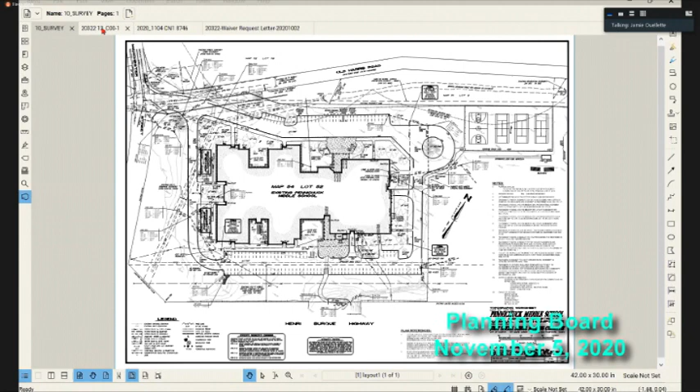Moving to the new proposed site plan. We're proposing to flip that for safety reasons and protocol reasons for the school. So now buses can come from the south off of Manchester and enter onto a secondary entrance, which can be utilized strictly for buses and for emergency vehicles as a secondary entrance to the site.

They'll come around, they'll drop off at the bus back entrance here, come around, and then come to this intersection here. Signalization will bring them out to this intersection. Signalization, then again, proposed signalization would again allow them to go north or south as they intend to go.

Coming from the north, the buses would also come down. They'd come into the site. They'd loop around that same loop and then come out that same way. Parents both would come from north and south through this main intersection. They'd pull into the drop off. They come in, they drop off and loop around and come out the site.

Stop at an intersection here, and then when they're signaled to go, they come to the intersection up ahead and move to whatever direction they intend to proceed. And then there's an additional queuing lane here. This is one of the items that was requested and wanted to be reviewed at that last meeting.

And we reviewed that with the school district and the traffic engineer, and it made perfect sense with counts and observations that were done for pickup time, that there's a queuing lane so that people could bypass the people waiting for the school to let out, and then come into the parking lot or whatnot as they intend to do. And then they would loop around and come out the same way, as suggested before.

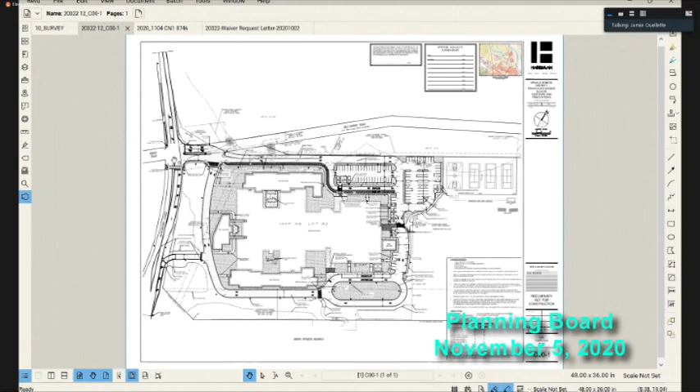Additionally, I'll zoom in a little bit here. It's probably hard to see my screen. There was a comment that we did receive. I wanted to make sure that we noted that we added a containment around the dumpster pad with fencing as requested in the previous meeting.

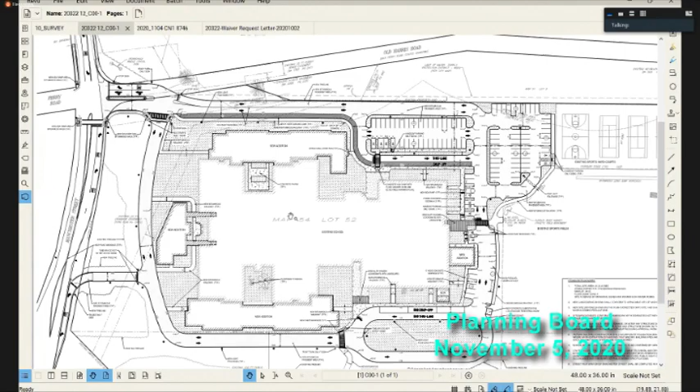And then one of the other topics that we were talking about at the last planning board meeting was the signalization here and whether that was warranted or not. Giles is on the call here and can talk a little bit about what that means. Sure. Giles? Yes, that's my cue.

Good evening, Giles Ham with Vanasse & Associates. Just by way of a little bit of background, in June of 2019, VAI was retained by the City of Nashua to look at several school alternatives within the community, and obviously this school was one of those schools we looked at. I personally have been out to the school on several occasions, back in June of 2019. We've conducted a series of traffic counts at the school,

and we made a number of recommendations to improve safety conditions in the area, particularly for the children crossing Manchester Street. At this location, we made recommendations to upgrade all the school signage along Manchester Street to establish the school zone and the end of the school zone. As Jamie alluded to, we're separating the bus traffic from the drop-off traffic in the pickup area, which is appropriate and typical for schools like this.

And then finally, we've recommended signalization of the school driveway. A lot of that was in the 26-page document that Matt alluded to, the earlier document that you've had. Subsequent to the last meeting, in the memo that you've got this week, we've updated the signal warrant analysis at that location. Essentially there are 9 warrants, but the one we looked at in particular was what's called the school crossing warrant.

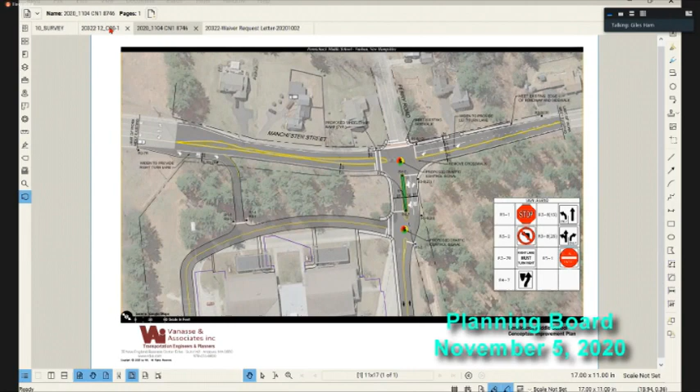So that's really a brief summary. Again, it's a detailed engineering study. The signal is warranted. We feel that this will provide safe conditions for the children crossing the street. And that's really a brief summary of what we've done. Okay.

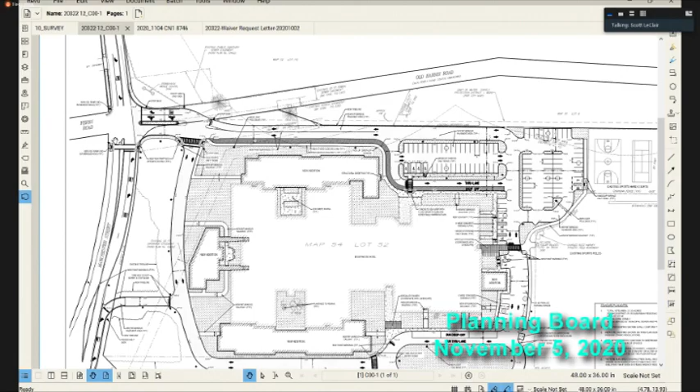Can you talk about the crosswalk in the construction? I can see it on the left side of the plan. What's the intention there, are there walk buttons, or what's the control concept? Yeah, so the signal itself will be fully actuated. That means when there's a demand on the street or a turn lane, that'll call the traffic there. And certainly the crosswalk there will be pedestrian push button. So you push a button, it stops all the traffic, and then there's a safe crossing.

So what's different when you look at this plan here, and came up with our staff discussion, probably last week, is that right turn lane, we're probably going to take that right turn lane out. We've looked at that. And what that allows us to do is to reduce the crossing width for the children. It's a 40-foot crossing with that right turn lane out.

We're going to have at least 16 seconds for safe crossing. And that's based upon studies in terms of the width of the crossing and the time people travel, feet per second, as well as a startup time and then a time to accommodate that there'll be more than one student crossing at the same time. So yes, pedestrian actuated.

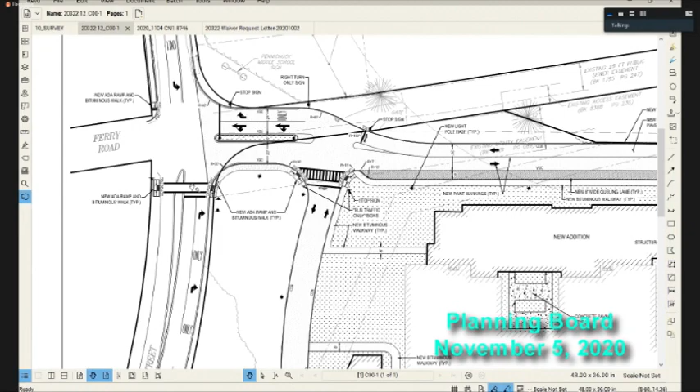Okay. And again, can you scroll down the page a little bit? So the right turn, you feel that can go away because? So the right turn lane, the upper one, right? That one will probably be eliminated. Again, we haven't done the design yet, but we've looked enough at that to think we're probably going to take that away. The other lane is just for the buses only. The buses come right in there and they loop around, and we think that's a good idea.

Okay. All right. And the reason the right turn lane would go away is more to do with shortening the crossing distance and time. Right, and that was a suggestion of city staff, and it was actually a very good suggestion. We had a good dialogue with staff about the proposal here, and the concern is that we need to time the signal such that traffic doesn't back up to Route 3. And keep in mind, with any school project like this, we're really looking at a peak 20 to 30 minute period that we need to handle this traffic and process it in and out.

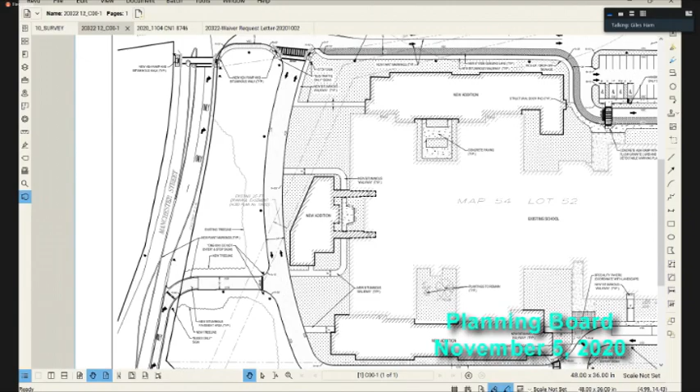As with any middle school, any school project, you have a large peaking, and you'll have some queuing on site and queuing to exit, and that's typical with any school project. And as you've seen on this plan, we've modified the on-site queue storage to adequately accommodate the parents. The peak time when you have the queues there is in the afternoon, where the parents arrive early and park and wait for their children to get out of school.

It's also important with a project like this that when this new change is opened up, the school should send some correspondence to parents and caretakers to update them on how we expect them to behave and the procedures for entering and exiting the school safely. That's typically done before you open up a school like this. Okay, thanks.

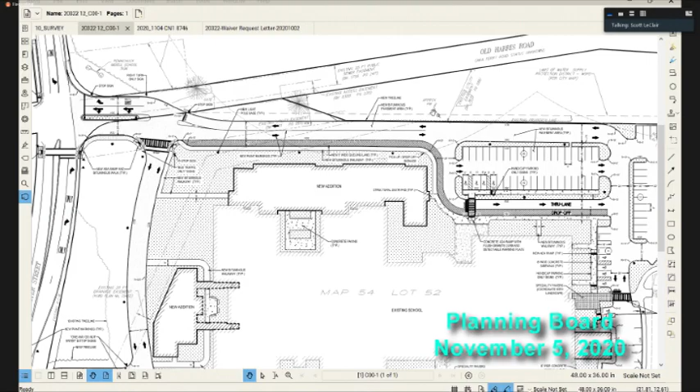All right. Anything else you want to present before I open up the board questions? I'm all set, Mr. Chair. Would you like me to close my session here? I think you can leave it up for the board part. They might want to reference it. They're pretty good at speaking out. So anybody from the board who wants to ask some questions, go ahead.

Weber? Go ahead, Weber. Yeah, a couple of questions. One, the queuing lane for people to drop off and pick up. Have you figured out that this is sufficient for the amount of traffic that you've had?

Yes, so when I was out there in June of 2019, one of the things I looked at was the queue. So currently, or in 2019, the queuing is in the back of the school, and they double stack to pick up. So we've looked at that distance and that queue, and we've accounted for the fact that the school population is going to increase. So we think that that's adequately sized

appropriately. Okay, also, are you going to be putting no parking signs on the queuing area, only pick up cars? That would make sense. Yes, that would make sense.

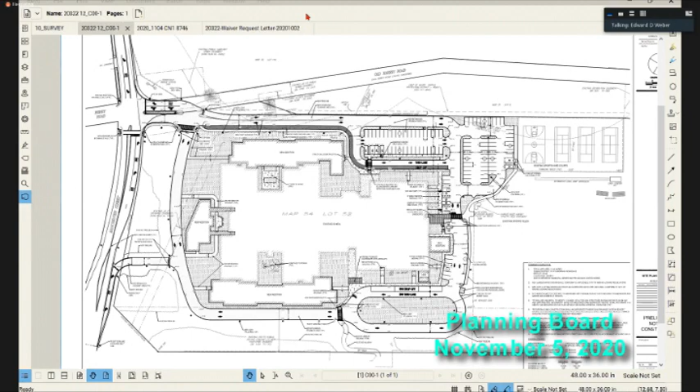Inside the school area, there's a crosswalk there. Is that also going to be controlled so that pedestrian students don't interfere with the busing traffic turning, coming in, coming out? I'm sorry, what's your question again with regard to that? Right where you're at, is that just going to be not lit, nobody pushing a button? They're just going to be able to cross when it's clear?

We really haven't gotten to that detail yet. Certainly we could put a pedestrian signal there, that would maybe make sense. Keep in mind that exiting traffic there is going to be school buses, and you have about 11 school buses today, so that's going to increase with the expanded school.

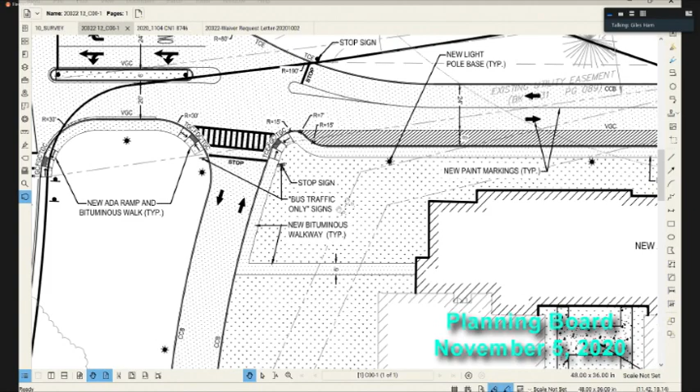The other thing I would tell you, it was a good point, is where we have the queuing area, typically we'll put signs like parents can't leave your car, because what we don't want is to have them park their car and then walk in, and then it doesn't work. So there'll be appropriate signage to make sure this works correctly and fluidly.

And like I said, a real key is to get some correspondence out to the parents and say, this is the new school. This is how we operate. This is how we expect you to operate to make this work well and safe for the school children.

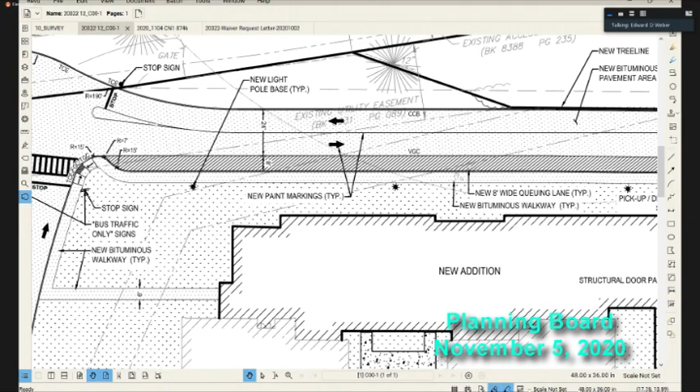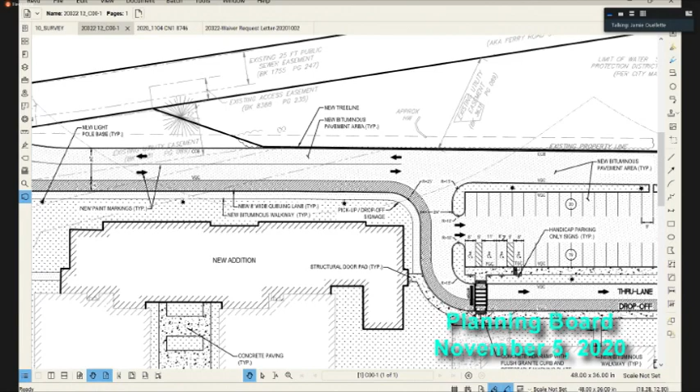Okay, and the next one, I see a lot of directional arrows and things like that. Will these be thermal painted so that in a few years they're not gone? We can review that with the school. I don't know if it's been decided officially yet, but we can review that with the school district as a good option to include there.

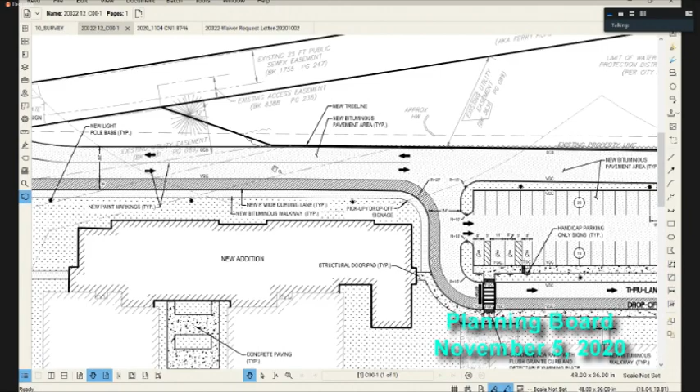Okay. The reason I was concerned about the queuing is so that people aren't parking across the street waiting for the entrance area. That's why the queuing is important to be the length that it is. That's it. Other questions from the board? I have one. Go ahead, Mr. Peterson.

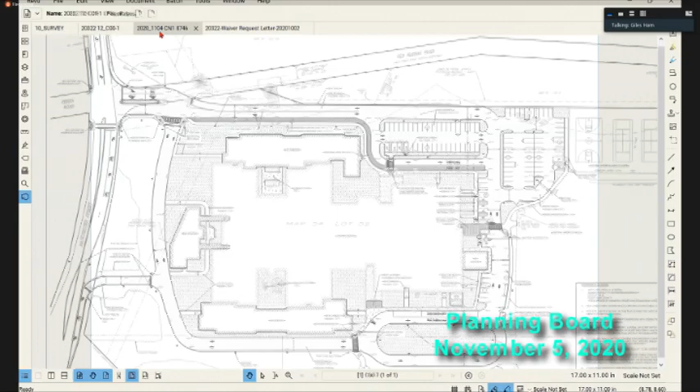The right turning lane that will be removed for vehicles heading north, will those vehicles still be able to make a right turn into the school with that lane missing? Oh, absolutely. That lane will basically be a through and right turn lane. And again, it's a matter of safety and reducing the crossing width. And I think that was a good suggestion by city staff. Okay, thank you.

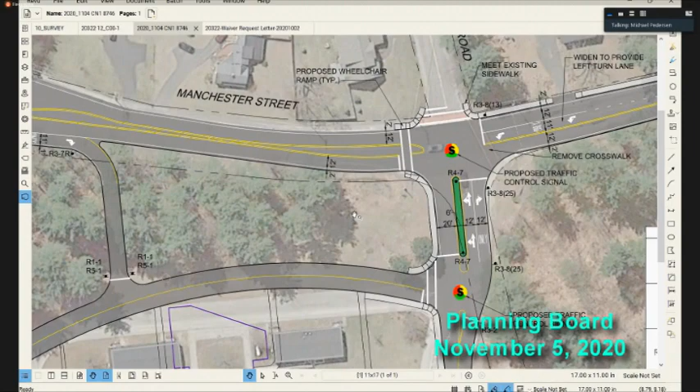Just to clarify, the right turn in there, would that be a no right on red? Maybe you haven't got that far yet. Yeah, we haven't really, this is just concept. We're just getting back on board, quite frankly, with the project. And so we were asked to pick up from the last meeting and help you with your

questions this evening. And then subsequent to an approval by this board, we would get into the real design detail of the signage, where the mast arms are going, the pedestrian signal heads, the pedestrian timings, how long when you press the button, and all those things. That's a lot of design that's really subsequent to this effort. Okay.

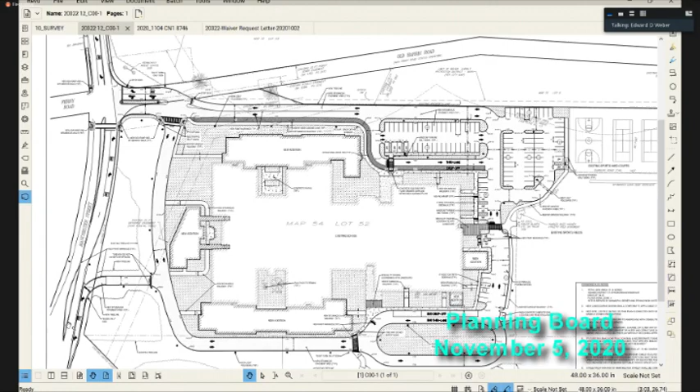Other questions by the board? Weber again, I'm sorry. Go ahead, Mr. Weber. With this one lane only, emergency vehicles, if something happened, has this been talked over with the fire marshal at all? Yeah, early on during concept design, we had a meeting with the fire marshal and police. And this was actually a push from them as well. Two entrances to this site was strongly desired. So the answer to your question is yes.

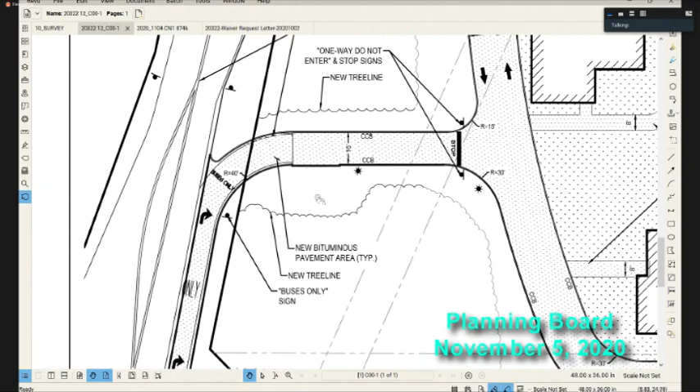Okay. And Jamie, one other thing, just to make sure I'm reading it right, that you did make a change: that center parking island that's in the drop-off area, that's like one way in, one way out now? Yes. Oh, yes, that's right. We flipped the arrows here because parents were coming in through here. It made sense to have this as a one-way so that people weren't trying to kind of loop back into that same drop-off area.

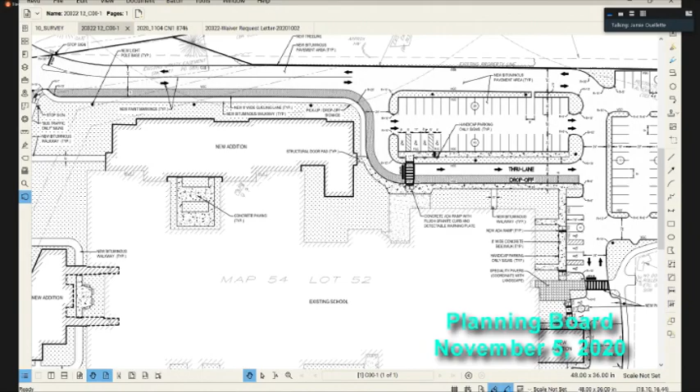So if they were just coming out and everybody was coming out that same direction, that made sense. I should also mention that we did notice that in our previous submission that you would have seen before this, this arrow was flipped as a one-way as well, and that's not intentional. It's supposed to be just like you see here. It's two-way traffic for the buses coming from the north. They'd be able to come in and come onto site because they can't obviously make that turn that you see down below there.

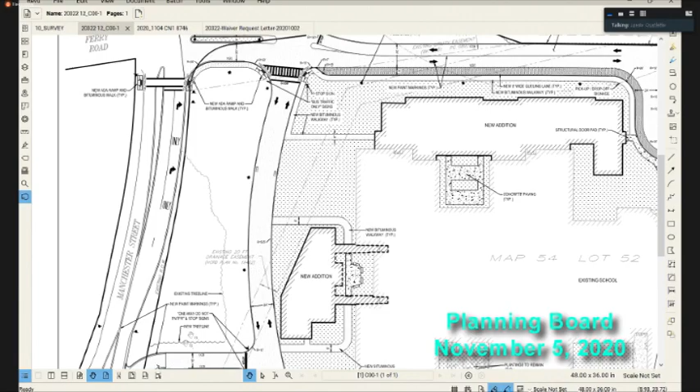Yep. Okay. Any other questions by the board? You can probably stop sharing, Jamie. Okay, sure. Mr. Chair? Go ahead, Mr. Bollinger.

Yes, thank you. I just wanted to clarify, we went from one hypothetical signal, I think at the last meeting, now we're talking about installation of 2 signals. Is there any idea of the anticipated cost, even if it's a ballpark, roughly the cost of installing 2 signals at this location? The cost is part of the school project budget. The cost to install the signals are.

Well, okay, but like, how many dollars are 2 signals eating out of the overall budget? Is it 200,000, 500,000? I'm just trying to understand, because the premise of the question is, I believe Mr. Ham gave testimony that this is really only going to be needed for maybe about a half an hour in the morning and a half an hour in the afternoon. And let's set aside the internal signal for a moment, the one actually in the public right of way. I'm having a hard time wrapping my head around the fact that we're going to have a signal that basically does very little for 23 hours of the day.

There are other types of array systems out there that track with the sun, and those are positioned north to south. This is a fixed tilt that'll have a 25-degree face. It'll be constructed on steel posts and steel racking, and all of that gets grounded and put together correctly through our certified electricians. The construction for solar is remarkably simple, and it's very quick.

We don't require any formal or significant foundation systems for our array. We can drive these C-channel or I-channel beams into the ground 4 to 7 feet deep. That provides a resistance for pullout, and it gives us the stability as well for the loads of wind and snow on the foundation.

So once the trees are cleared and the ground is kind of manipulated slightly, we try not to do too much grading. We like to work with the land and minimize our impact on the land and allow the natural vegetation to grow back quickly. So we try to minimize our grading. And then that allows us to get quickly in here and install these posts. If you would flip to the next picture.

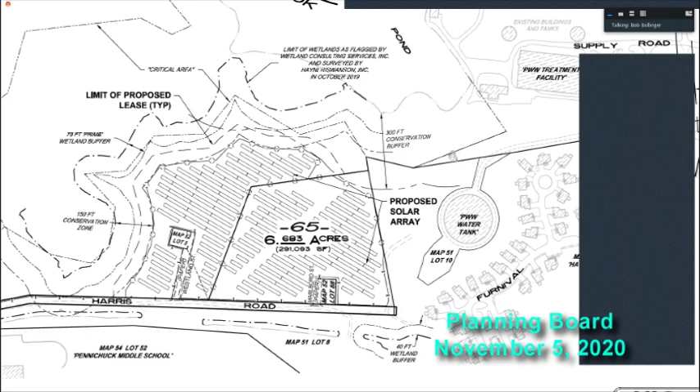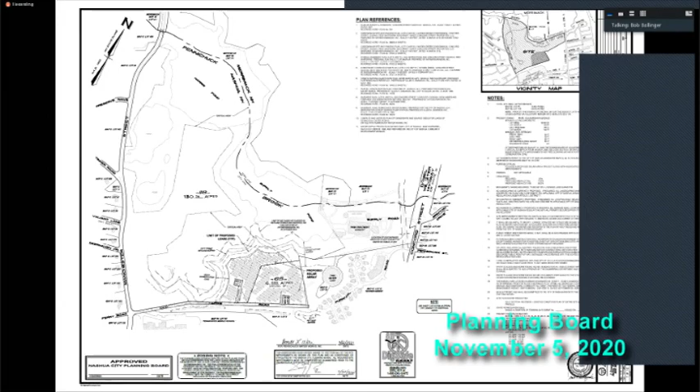Thank you. Mr. Chair, if I may ask another question? Yep. I think this one would probably go to Mr. Zajac. I think you may have addressed it generally. I think the primary comment from engineering staff that jumped out to me was with regard to right-of-way and ownership. I think it was their comment number 2. Do you feel that you have sufficient documentation with regard to ownership issues and paper street issues that would satisfy engineering comment number 2?

Yeah, again, this is Tom Zajac. I'd be happy to answer that question. We've been doing this with the project attorney and project team. We feel we have a strong case that this is a public way in looking at the historical uses of this roadway and right-of-way, along with looking at the RSA. That's really for the project attorney to lay out the specifics of that case, and of course, we'll look to the city engineer's office and corporation counsel to confirm that approach is correct.

Okay, thank you. And I will ask one quick follow-up to that. If it is determined that Old Harris Road is in fact public, there's been a gate at the westerly end of Old Harris Road ever since I've lived in Nashua, and I didn't know if the gate affected the determination of public versus private and whether or not the gated access would continue if it were deemed public. I can't imagine folks would have a lot of need to go back there, but it would be obviously an exception to pretty much any public way where it's gated. So I would offer that at least for consideration. But if you have any thoughts on the gate or the history of the gate, that would be just food for thought moving forward as you try to make that determination.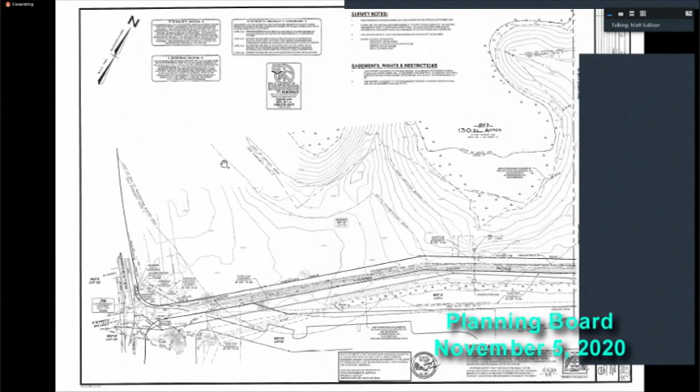The chair. Yeah, go ahead. I did have an opportunity to speak with Tom before the meeting, and I would like to recommend, should the board choose to proceed this evening, a 6th condition, and I'll read that at a later time in the meeting, covering the paper street matter. I do want to recommend that any kind of approval be conditioned upon the fact that both Corporation Counsel and the Division of Public Works have an opportunity to favorably review the opinion to be provided by the counsel of the applicant. Okay, sure.

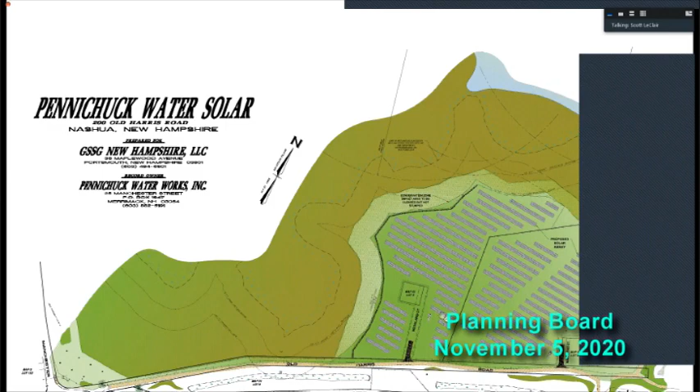Question by Weber. Yeah, go ahead, Mr. Weber. The fencing that goes around it, is that going to have any kind of security so that curiosity doesn't get the better of human beings and want to go into this area?

So all the fencing will have, there will be gated access along the two paper streets to allow us to get into our array areas to be able to do maintenance. It also will afford the individuals access to their lots. All the gates will be locked and have a quick entry key system that can be used by police and fire in the event of an emergency. But it will be completely enclosed, and it will not prevent

access, essentially. Okay. Second, I know technology has been around forever, and solar panels, but it's always upgrading. And to be able to receive more power with sensitivity, are the panels going to be used the most up-to-date panels going around?

I can go along 100% with that reflective stuff. At the Historical District Commission, we had panels where neighbors were right next to it, and they were concerned it would shine right up into their house if they were reflective. And no, they weren't at all, and they didn't have any problem at all with the reflection. My sons have solar panels on their house, and they're no problem at all, and they're really happy with the solar panels that they have. So just that other question.

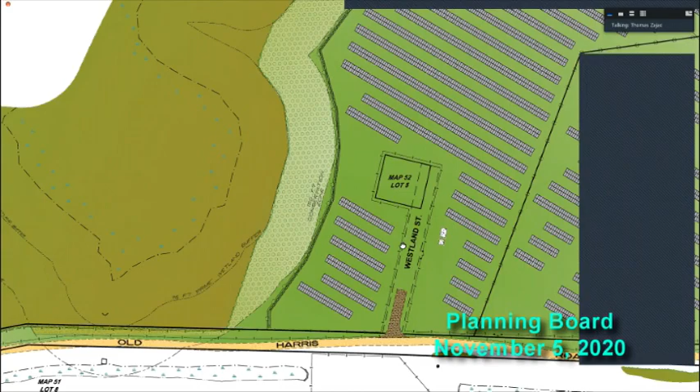So if you zoom in, we are respecting a paper street. The underlying fee of each lot on each side of the road runs to the center line. So we've got fencing around that entire width of the paper street. So we would be respecting existing access rights for each one of those lots on the paper streets back out to Old Harris. And then of course, Old Harris is a public road. So those rights.

Okay. Question, Mr. Hudson? Thank you, Mr. Chair. I would just ask the applicant, while they're doing the research and the legal opinion, to also review that if Old Harris Road is determined to be a public right of way, what will be required for easements of the facilities that are going to be installed in that right of way. And do those need to go to Board of Public Works, for instance, for approval?

So, looking at the plan, I'm not an attorney either, so I'm very curious and interested to see the outcome of all that research. It seems like some roads are being maintained, some roads are being discontinued, and so I'm very interested to see what the outcome of that opinion is. Okay. Other questions by the board?

Mr. Chair, Ms. Harper. Go ahead, Ms. Harper. Just a couple of questions. The first is in this particular contract, who is the responsible party for the maintenance of these solar panels? So the asset owner will be GSSG New Hampshire. And then at some point, they may choose to sell it to another entity. At that point, that individual would be responsible. But in the current conditions, GSSG New Hampshire will take the responsibility of O&M. They will typically hire an entity to perform that as a service.

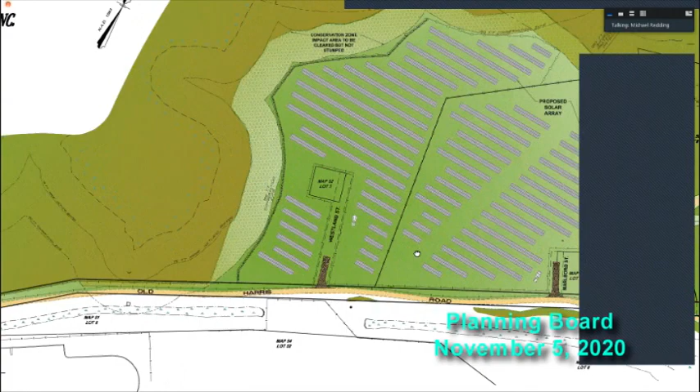They're pretty small in size. We're showing them as two separate pads, but there'll either be two separate pads or there'll be one contiguous pad that will equal the same square footage that is represented here, and positioned side by side.

So if you have two pads, are they interchangeable? One could fill in for the other if one of them goes offline, so you'd always have a spare? No, they're two separate units. Under the net metering rule, we're required to have their own entities, own facilities. And so we even have our own meter pole down towards Manchester Street for that reason. So they're not linked at all.

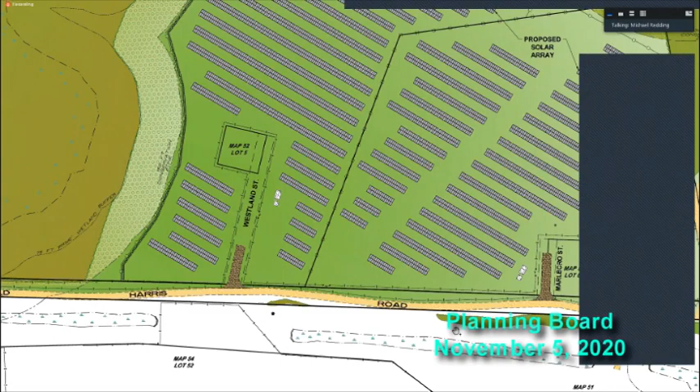Okay, and the electricity that's produced, does it go into the general power grid, or is it used for the wastewater facility? Yeah, it goes into the general power grid, and it'll go back to the substation that it's linked to. The electrons really have no preference. They're going to go where the demand is. So I would imagine that we're going to actually be powering the school for quite a bit, even though Pennichuck Water Works will benefit on the price of the power and the fact that they're getting the green power purchase agreement.

Okay, and my last question is that today the planning board received a letter dated November 5th from Doria Brown. She is the City of Nashua Energy Manager. And in her letter, she said this array produces enough to power 500 homes. But Mr. Redding, I think in your presentation you said 5,000 homes. So what's the best number?

My comment was in reference to this time next year, when we have the 13 projects fully built in New Hampshire, we will be able to power 5,000 homes. This is one of those 13 projects, essentially a tenth of it. So when the energy manager says 500, she's only talking about this project. Correct. Okay, thank you for the clarification. That's all for me. Thank you.

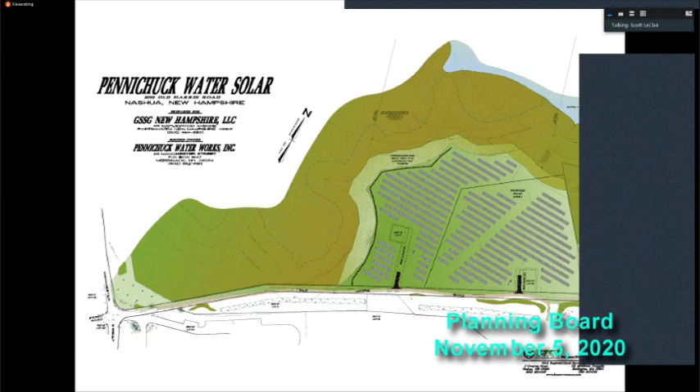Great. Other questions by the board of the applicant? Okay. Hearing none, at this point I would open it up: is there anybody in the audience wishing to speak in opposition or concern or have a question of the plan? And maybe Mr. Zajac, you can stop sharing for a minute too. Jim Pyle, question. Go ahead, Jim. State your name and address for the record, please. Jim Pyle, 14 Elliston Circle, which is part of the Eden Green condominiums.

The first comment is I'm definitely in favor of solar energy. I requested permission to put it on my own condo, but was denied permission by the condominium board. The reasons stated were that they were told fire safety was an issue, and they thought solar would lower property values, and the third reason was aesthetics. They didn't think it looked very pretty. So I would like to hear if there is any evidence that solar panels do or do not lower property value, and also fire safety. Will the fire department put out fires where there are solar panels?

Okay. Well, we try to hold the questions and collect them all and then have the applicant go after them. I'm sure Mr. Zajac's writing them down. They were submitted by email, so he should have. Okay, great. Anybody else wishing to speak in opposition or concern, have a question? Yes. Okay, go ahead and state your name and address for the record. Joan Ashley, 8 Elliston Circle.